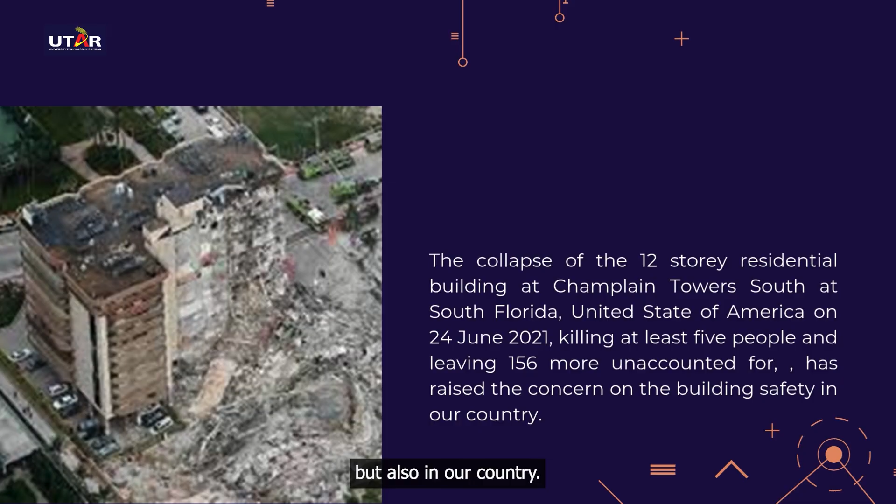The collapse of the 12-story residential building at Champlain Towers South in South Florida, United States of America in June 2021 has killed at least 5 people, with 156 more unaccounted for. This has raised concern on building safety, not only globally but also in our country. The question is, are our buildings safe?

How important is building assessment? In this Florida building collapse, a building assessment had been carried out by an engineering consultant, who warned in their report that there were major defects in the Florida building in October 2018, even before the building collapsed this year.

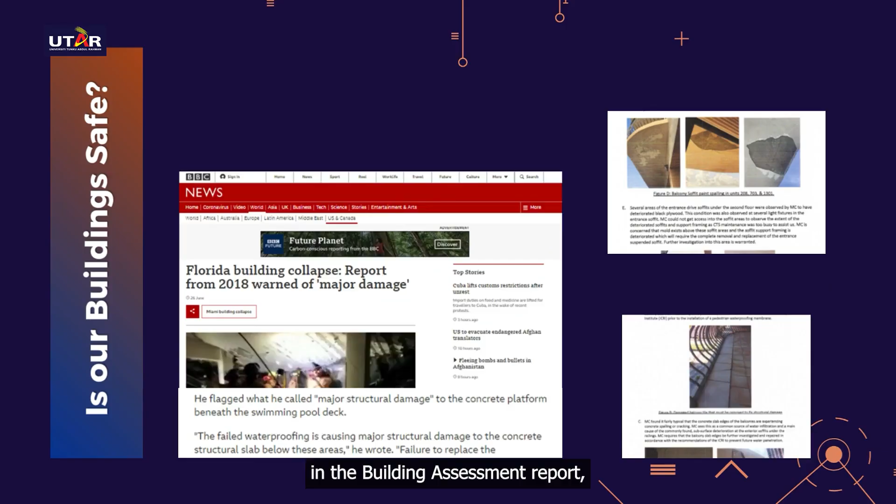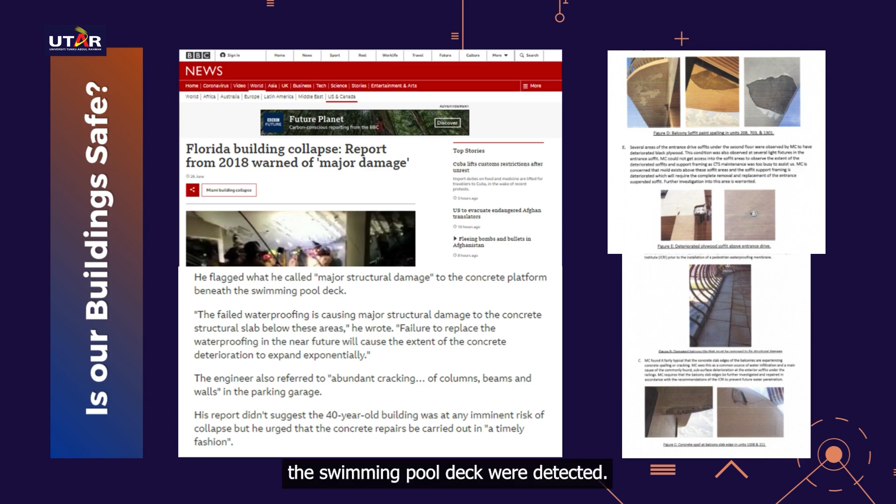In the building assessment report, it was highlighted that major structural defects to the concrete platform beneath the swimming pool deck were detected. The engineers also detected waterproofing errors, cracks below the structural slab, and cracking at the columns, beams, and walls in the parking garage.

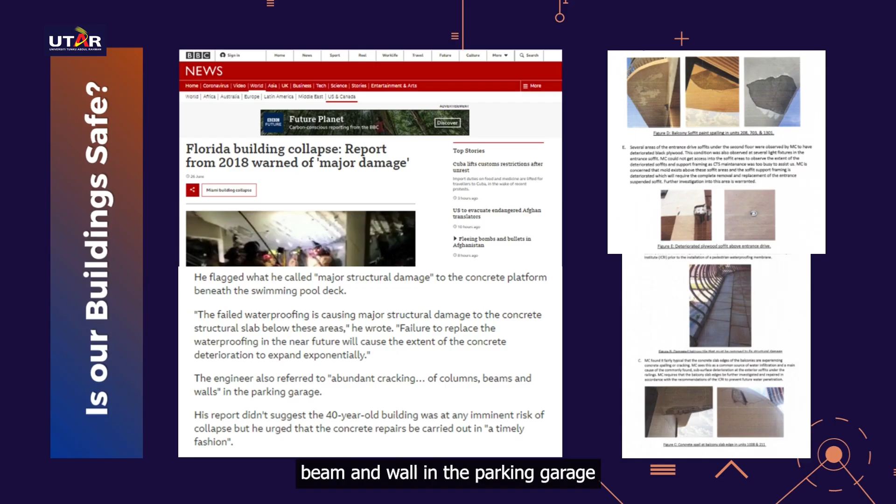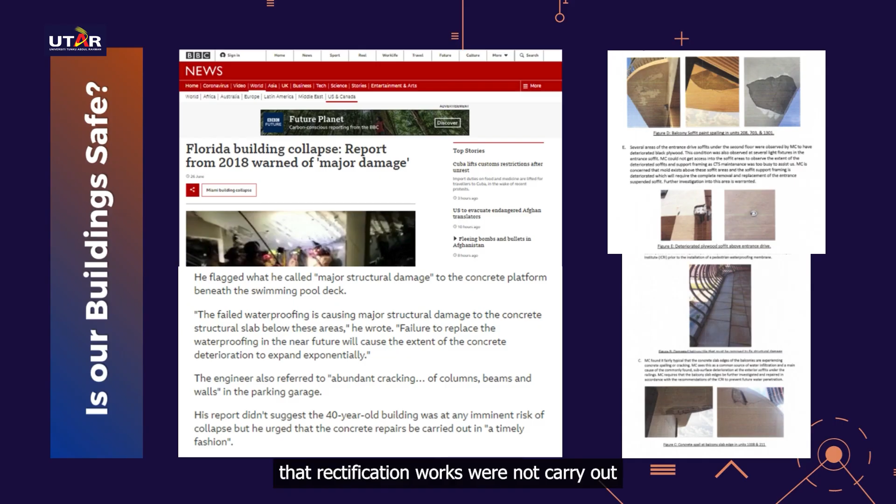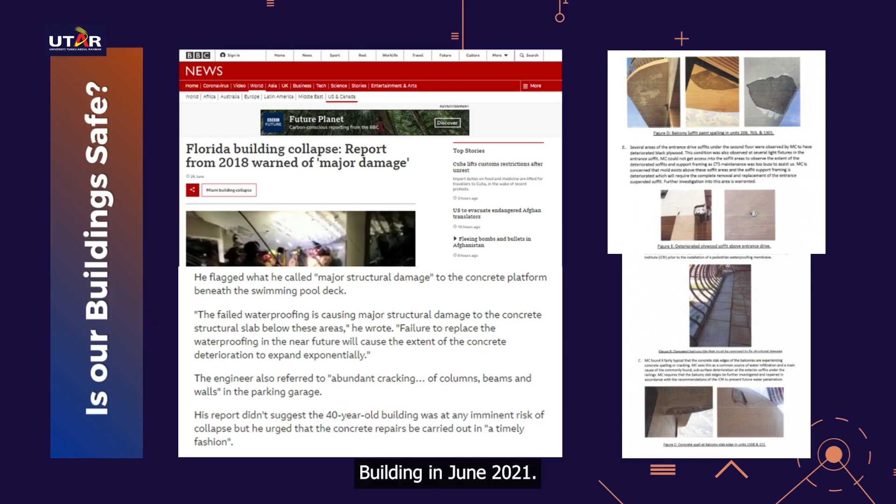The photos shown here are actual photos from the structural assessment report, showing the major cracks and defects of the Florida building that collapsed. However, it is important to note that rectification works were not carried out in this building, and this led to its collapse in June 2021.

Does this event only happen in the US? Is this an isolated case? Just 2 weeks ago, we learned about the new Hong Kong Pavilia Farm flat in Tai Wai, a construction building of more than 10 floors that needs to be demolished because the building assessment found it unsafe for occupancy, with major structural integrity issues that may be hazardous.

This is how serious building conditions can be. So does building collapse only happen in the US or Hong Kong, overseas? The question is, will this building collapse happen in our country? Is our building in Malaysia safe for occupancy?

This is one of the recent incidents of building collapse in our country. It happened in May 2019, where a building in Gombak near the LRT terminal in Taman Melati collapsed, killing 2 Indonesian foreign workers and injuring 3 others.

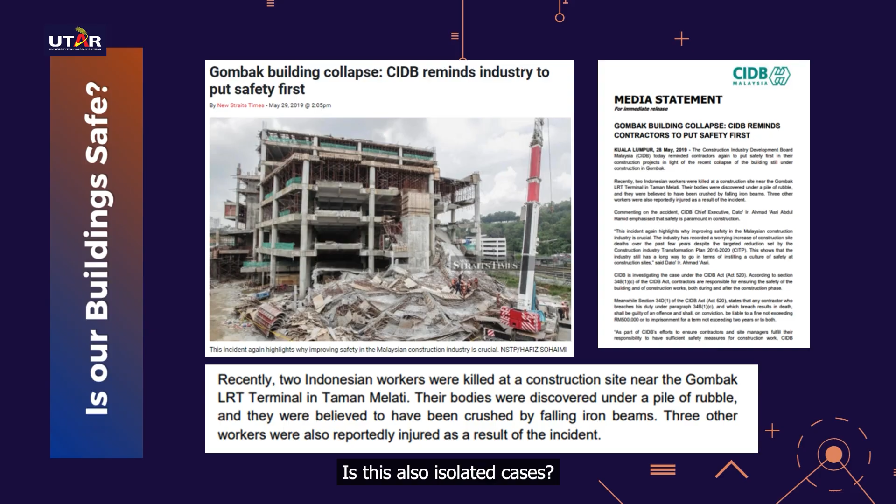Is this also an isolated case? No. Many would remember the Highland Towers collapse in Bukit Antarabangsa, one of the worst cases of high-rise building collapse in our history.

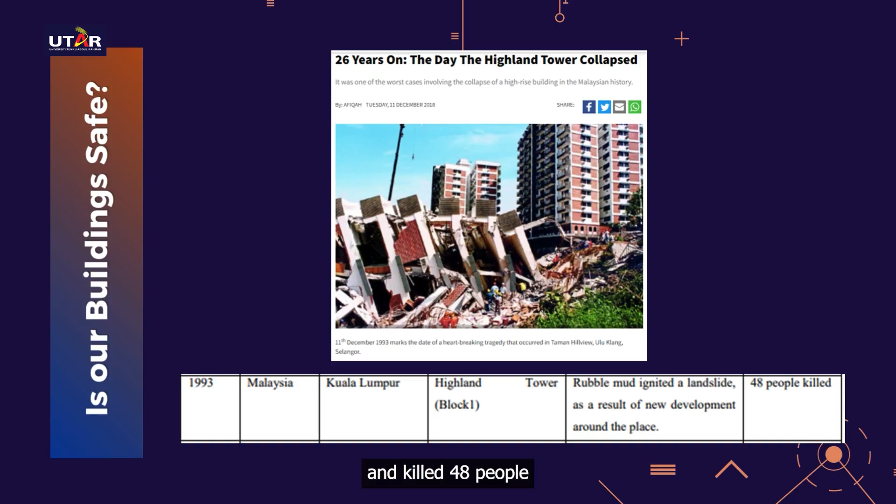It happened in 1993, where Block 1 of the Highland Towers collapsed completely, killing 48 people as a result of a mud landslide near the area. It was a huge site development in Bukit Antarabangsa, and not only did Block 1 collapse and kill many people,

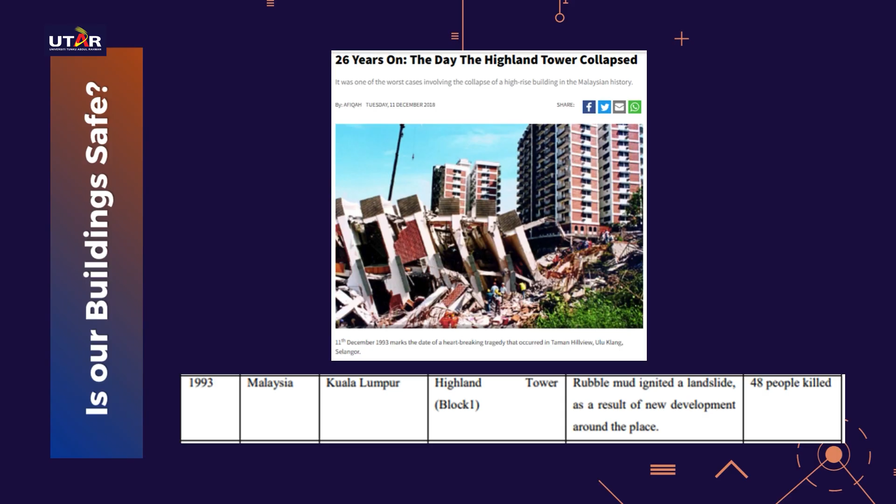but many people also lost their homes, as all occupants and house owners in Block 2 and Block 3 were instructed to vacate and leave their houses. All the units and apartments in Blocks 2 and 3 were abandoned, and these previous owners lost their homes overnight.

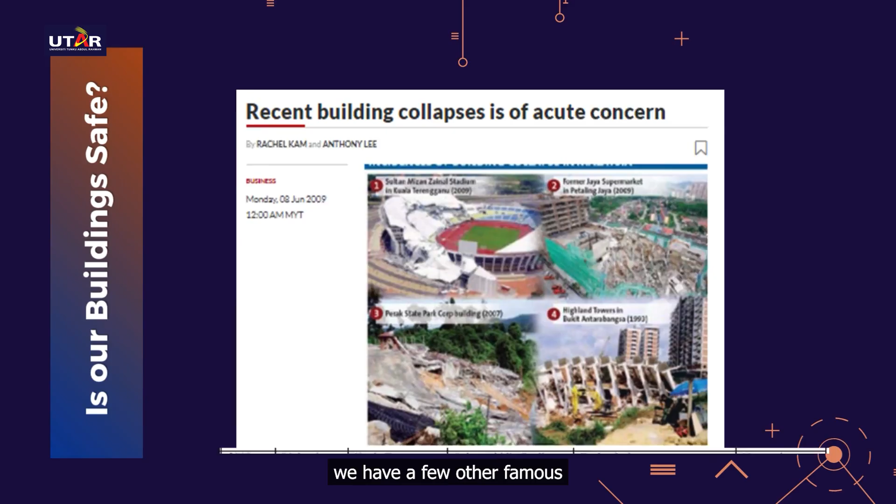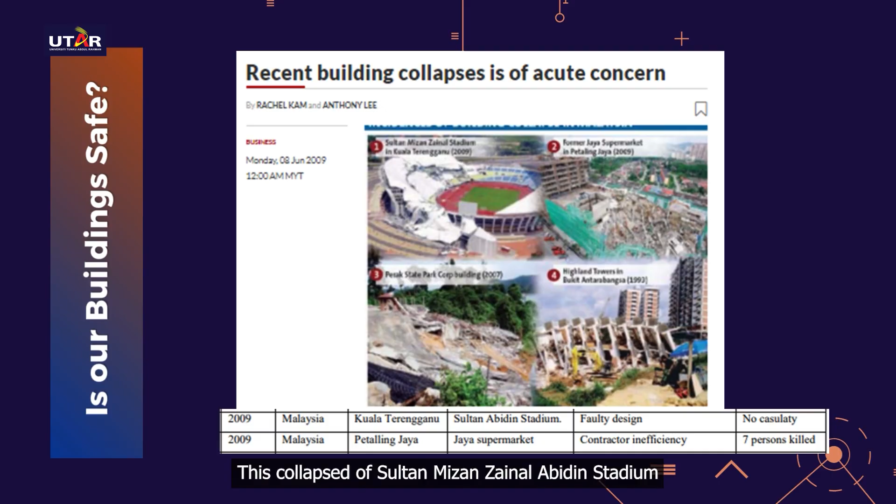Besides this, we have a few other famous building collapses that have happened in our country. Among them is the Sultan Mizan Zainal Abidin Stadium roof collapse in Kuala Terengganu, where the whole roof collapsed due to truss failure, though luckily there was no casualty.

However, in an incident nearer to us, the Jaya Supermarket building collapsed in 2009 and 7 people were killed. All these incidents have raised concern about building safety in Malaysia. How safe are our buildings in Malaysia then?

Generally in Malaysia, we have many pre-colonial age buildings that are still being occupied and in use. Is this building verified in terms of structural integrity and safety for occupancy?

In Malaysia, we also have many aged buildings, whether residential or commercial, still being occupied and in use. Some of these buildings can be more than 30 or 40 years old. Residents are staying there, and these are their only home. We cannot ask the residents to move out, but how do we assure that the homes they are staying in are safe for occupancy? What are the rules and regulations in Malaysia to ensure that buildings are safe?

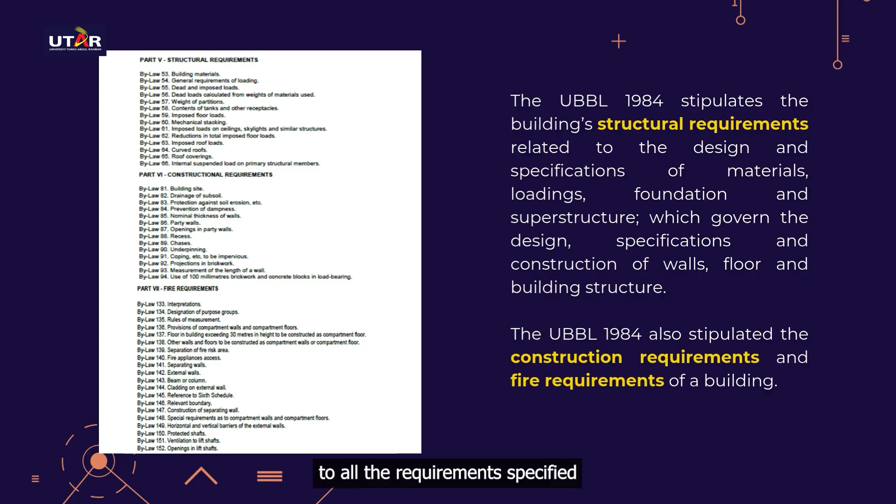Under the Street, Drainage and Building Act 1974, or Act 133, Section 85A requires that any building that is 5-story and above, exceeding 10 years old, needs to be inspected by a professional engineer registered under the Registration of Engineers Act 1967. This Act also specifies that the responsibility to carry out periodic building inspections lies with the owner of the building upon notice served by the local authority.

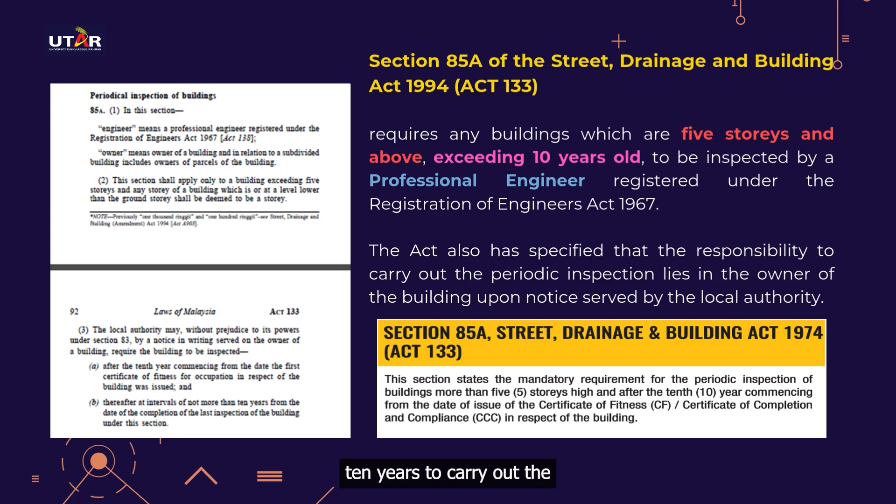Section 85A of the Street, Drainage and Building Act 1974, or Act 133, states the mandatory requirement for periodic inspections of buildings which are more than 5-story high, after 10 years, commencing from the issuance of the Certificate of Fitness or Certificate of Completion and Compliance (CCC) of the building. So Act 133 Section 85A has specifically required that any building more than 5-story high, exceeding 10 years, must carry out periodic building inspection.

The periodic building inspection shall be carried out by a registered professional engineer. After the visual inspection, if the engineer suspects that there is a defect, deformation or deterioration in the building or structural element which will or is likely to endanger or reduce the structural stability or integrity of any part of the building, he shall request permission from the local authorities to carry out a full structural investigation on the building or structural element.

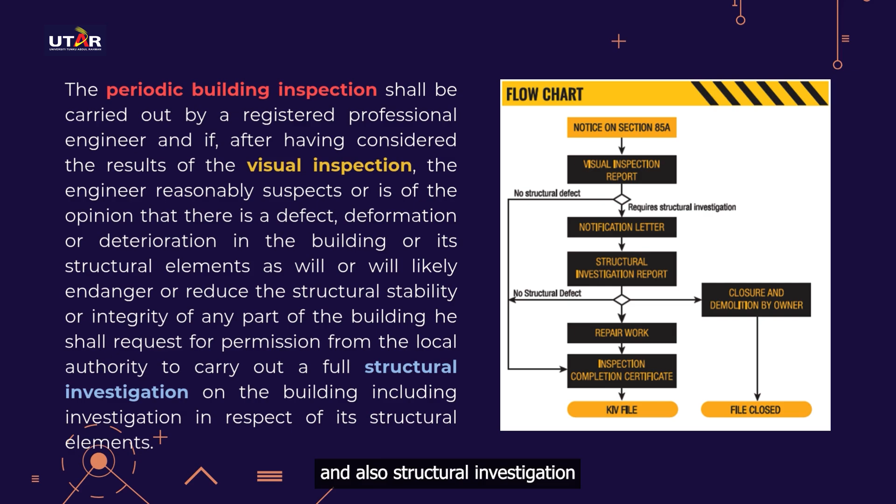The professional engineer appointed by the building owner will carry out the periodic building inspections through two methods: visual inspection and structural investigation where necessary. The local authority or PBT in Malaysia have their own guidelines for periodic building inspections.

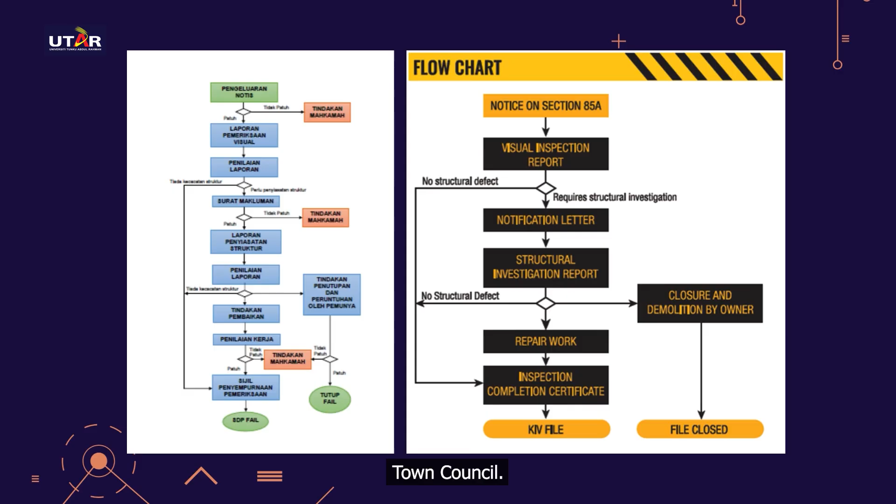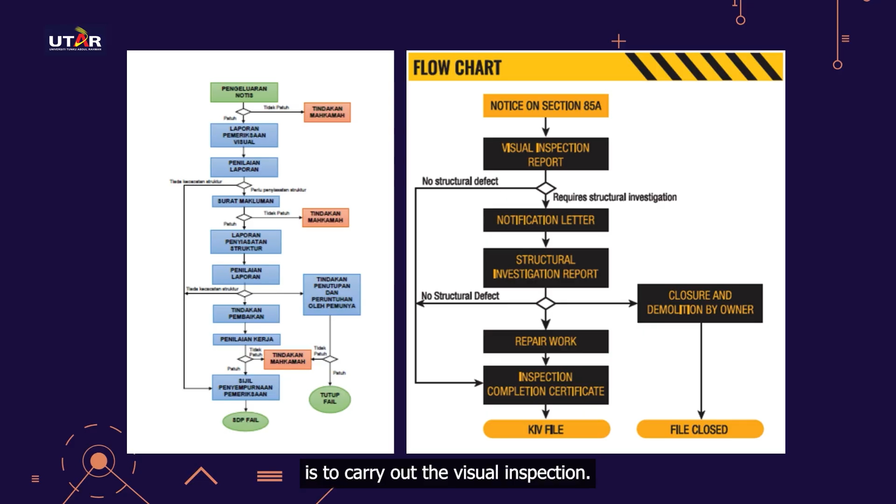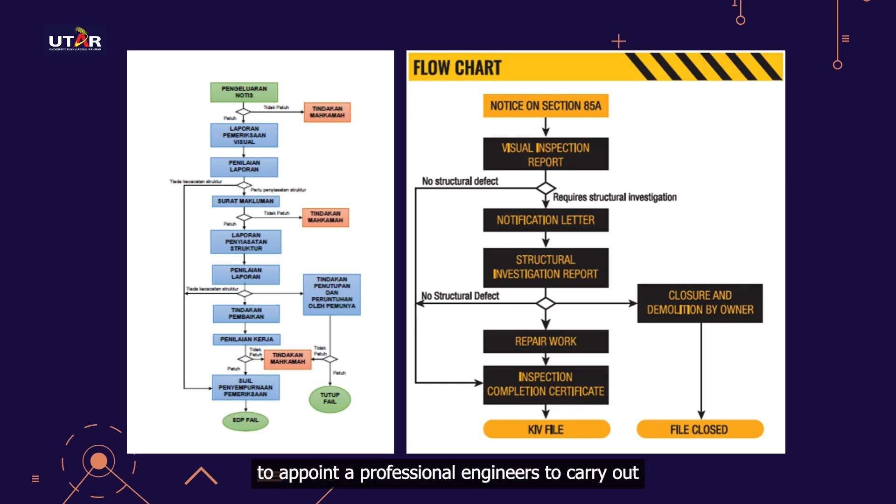As discussed earlier, periodic building inspections will be initiated by the local council through a notice served to the designated premise owner to carry out the visual inspection. The designated premise owner will then be responsible to appoint a professional engineer to carry out the visual inspection of the building. Upon the visual inspection, the engineer will produce a visual inspection report.

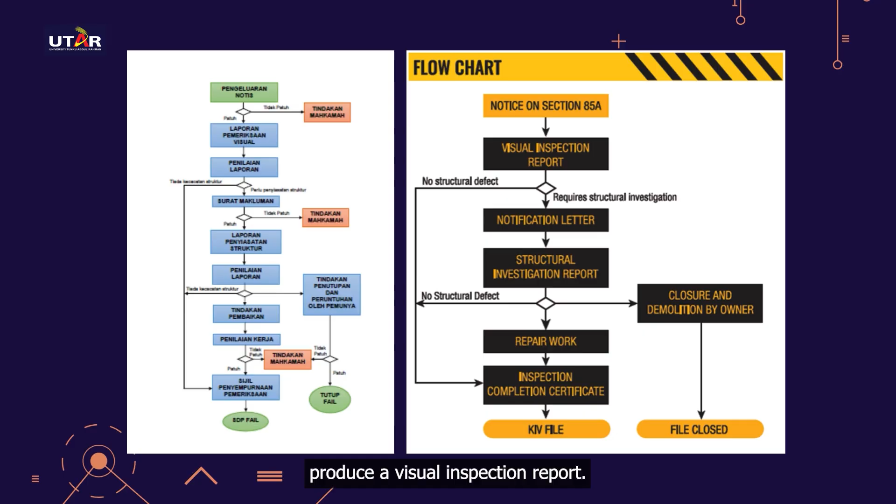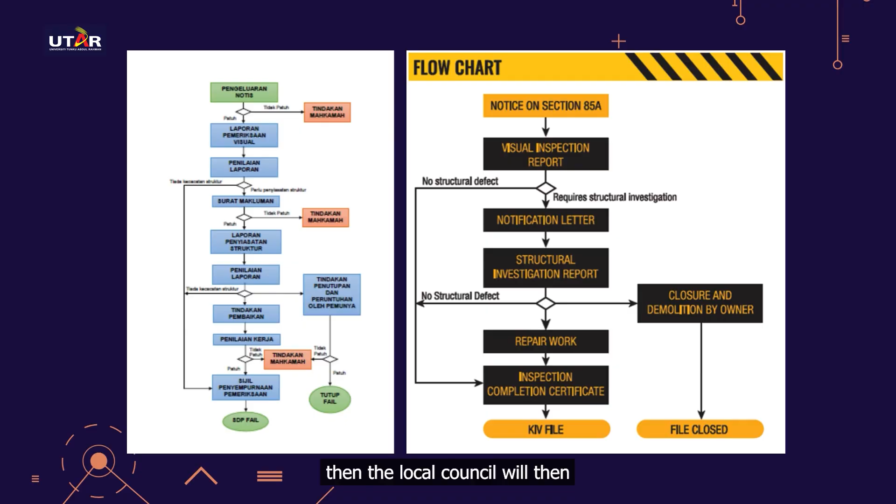If the visual inspection report finds that there is no structural defect found, then the local council will issue an inspection completion certificate to the designated building owner.

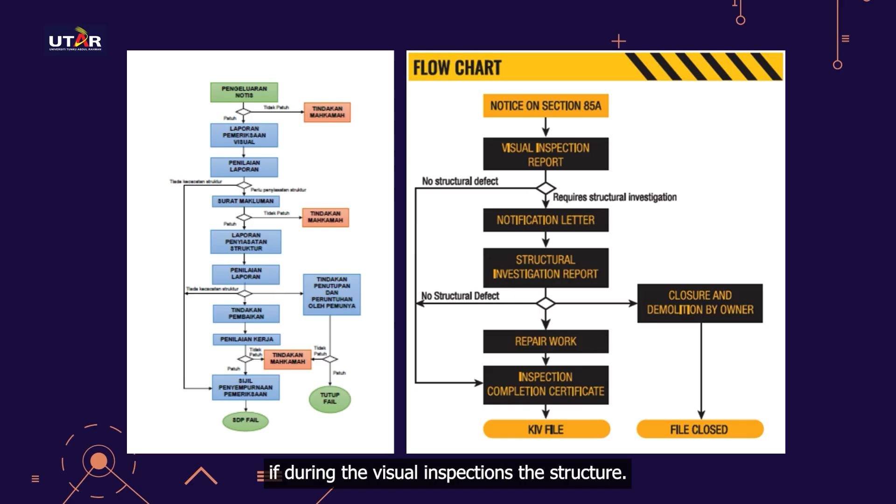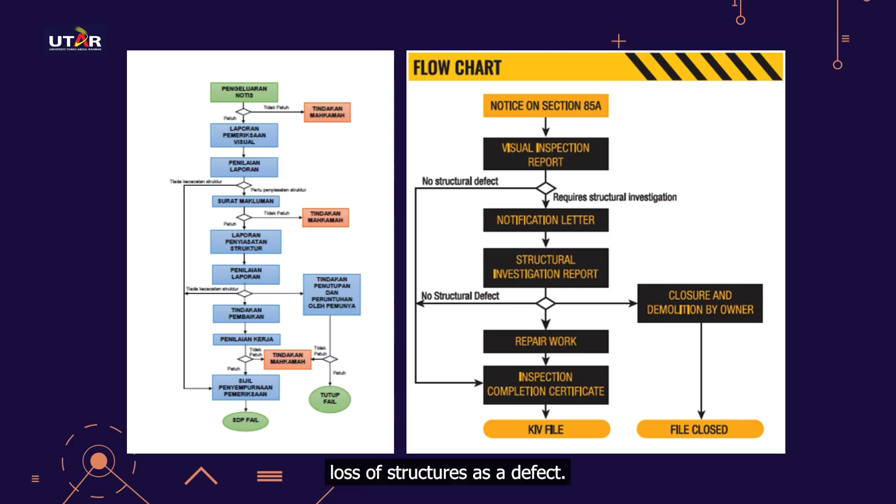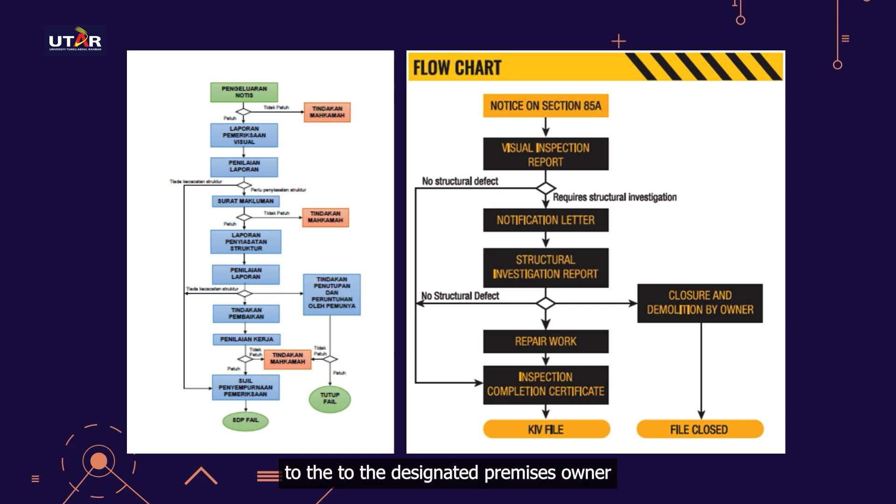If during the visual inspection the professional engineer found that there may be potential errors or structural defects, the engineer can recommend to the local council to carry out a structural investigation report. The local council will then issue a notification letter to the designated premise owner to carry out structural investigations.

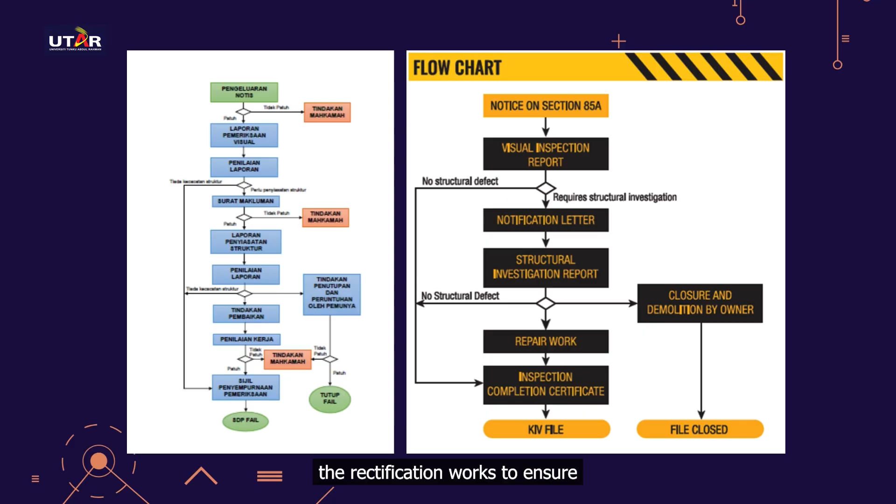Upon the structural investigation, if any structural defect is found, the owner will be responsible to carry out rectification works to ensure the building is safe and structurally sound for occupancy.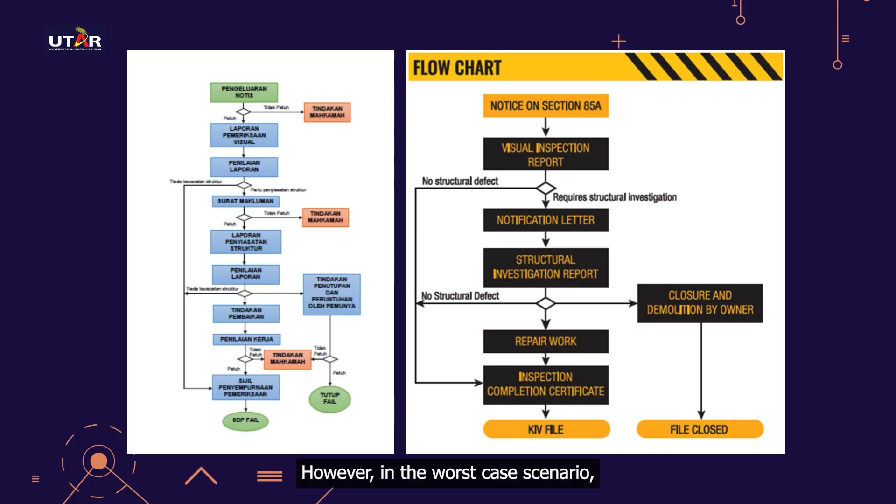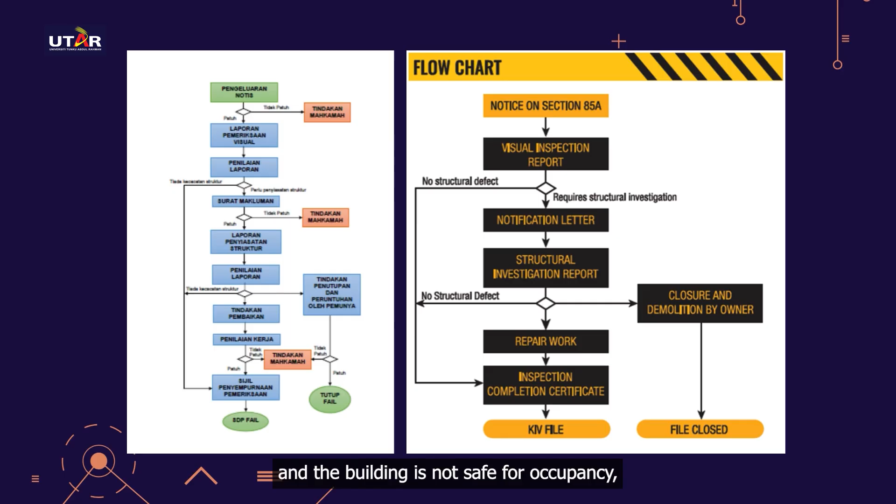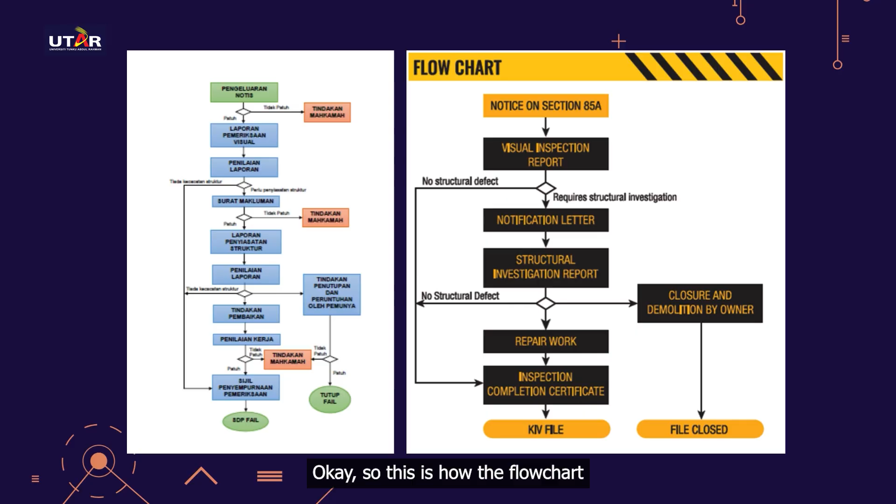However, in the worst case scenario, if the structural defect on the building is found to be very severe and cannot be rectified, and the building is not safe for occupancy, the engineer and the local council have the right to instruct for the closure and demolition of the building by the owner. So this is the flow chart of the periodic building inspection.

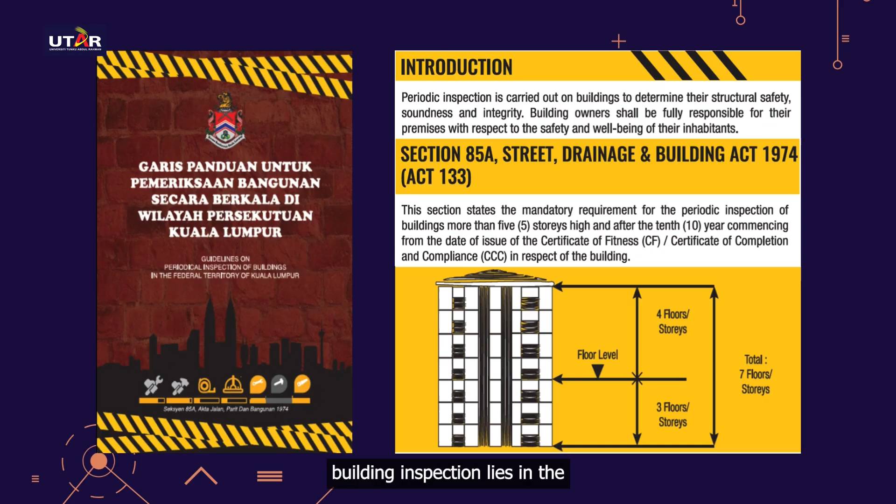In summary, periodic building inspection is carried out on buildings to determine their structural safety, soundness and integrity. The building owner is fully responsible for the premise with respect to the safety and well-being of their inhabitants. Act 133 has made it very clear that the responsibility to carry out the periodic building inspection lies with the designated premise owner.

Section 85A of Act 133 has made it very clear that it is mandatory for buildings that are more than 5 storeys high and more than 10 years old to carry out this periodic building inspection.

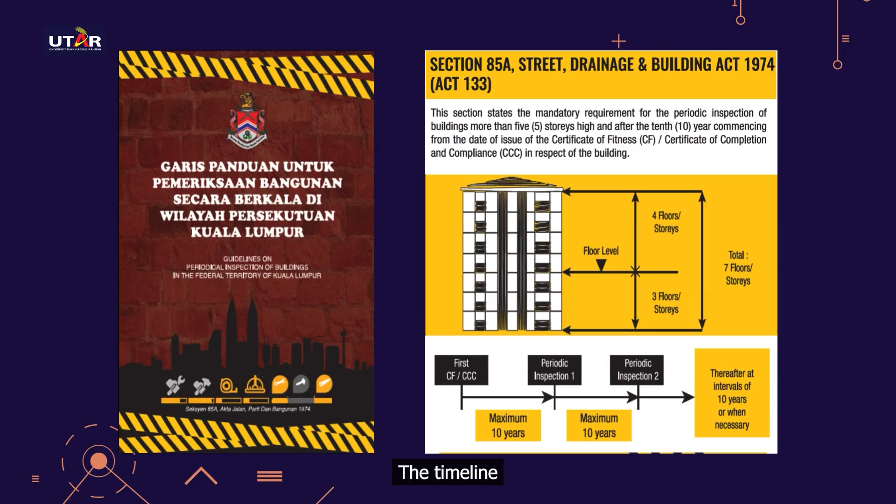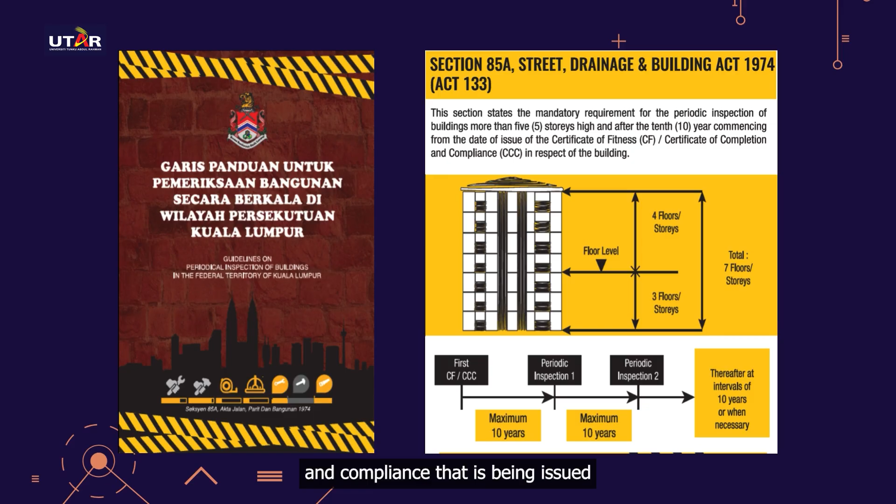So what is the timeline for these periodic building inspections? The timeline starts counting from the first CF, or the first Certificate of Completion and Compliance (CCC), that is issued to the building owner. At a maximum of 10 years, the local council has the right to call for the first periodic building inspection. And that's what happens after 10 years.

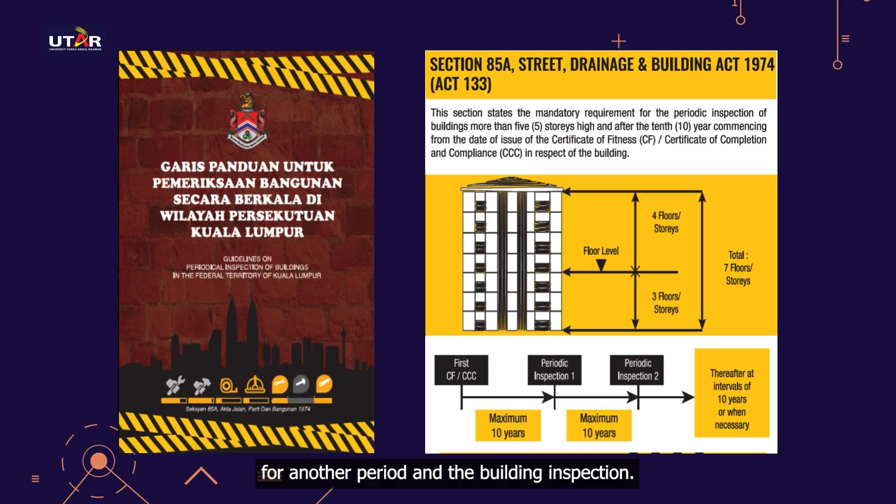In the next 10 years, the local council can issue another notice for another periodic building inspection. Thereafter, the local council can issue a periodic building inspection at every 10 year interval.

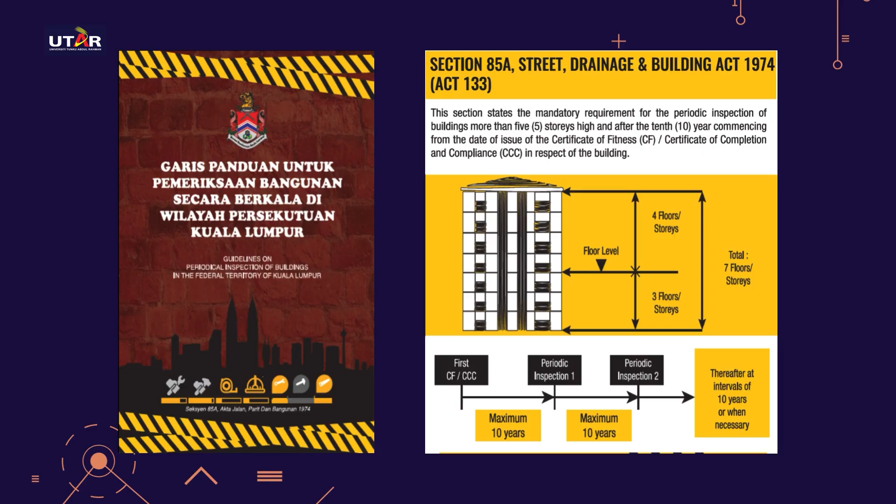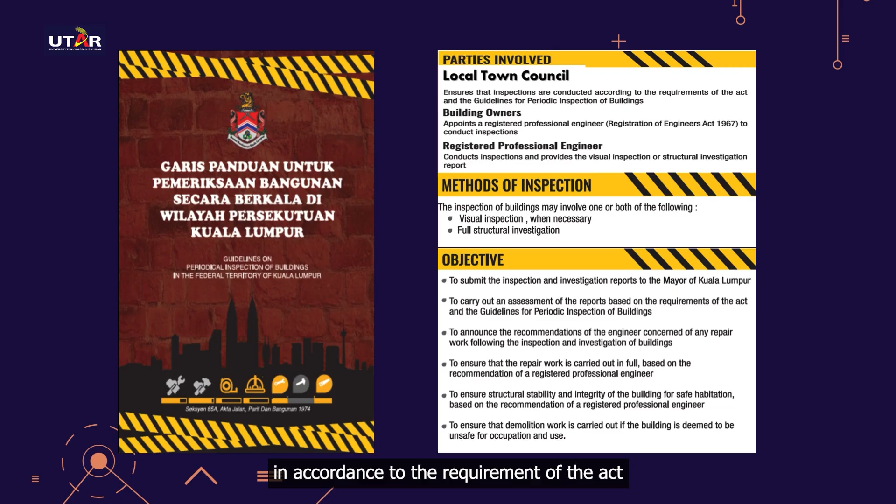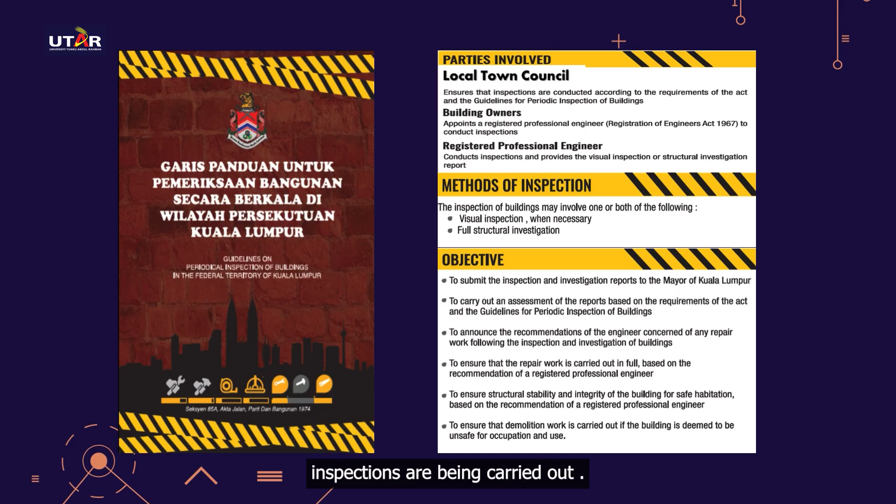So, what are the parties involved? The parties involved are the local town council, which are responsible to ensure that the inspections are carried out in accordance to the requirement of the Act and the guideline of the periodic inspection of the building. The local town council is also responsible to issue out the notice to the designated building owner to carry out this periodic building inspection. The local council will be responsible to ensure these inspections are being carried out, and that the inspection report are satisfactory and the building is safe after the periodic inspection is being carried out.

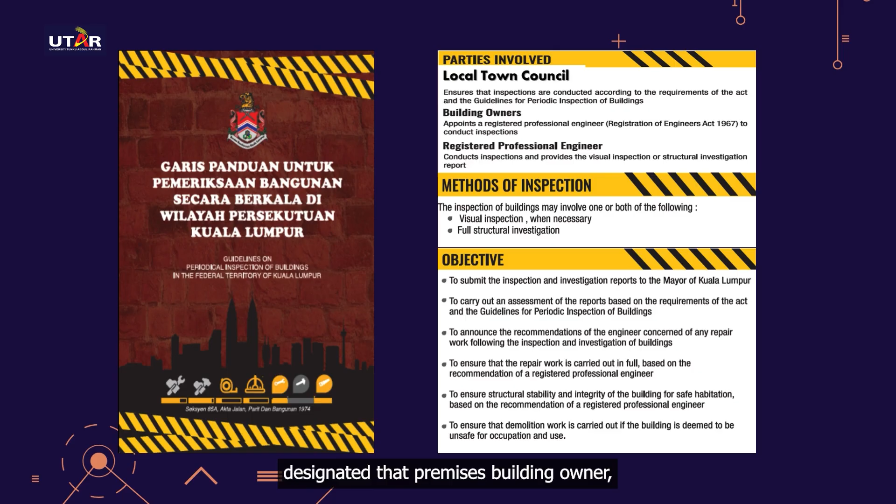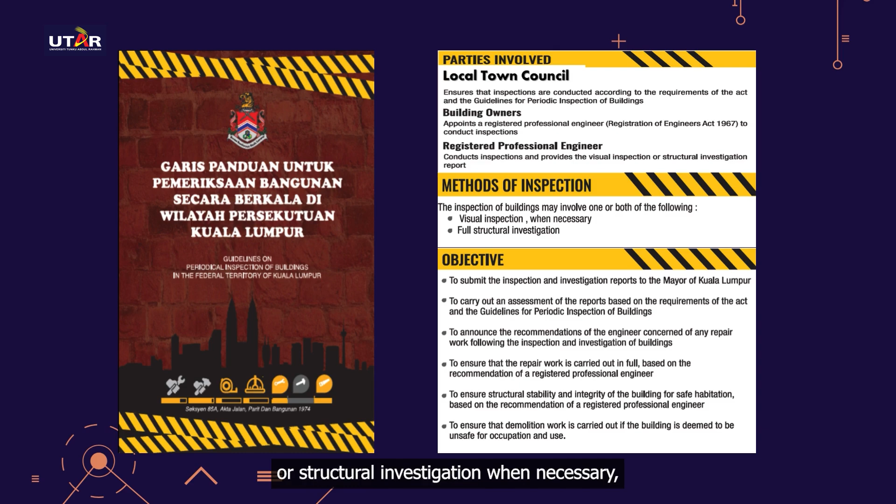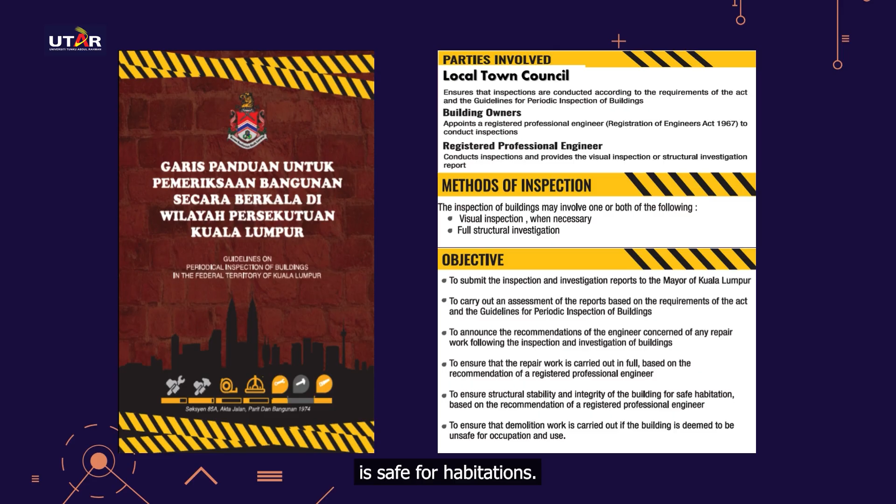The Act has specified very clearly that the responsibility to carry out the periodic building inspection lies with the designated premises building owner. So the building owners will be responsible to appoint a registered professional engineer to conduct the inspection. The registered professional engineer needs to conduct the inspections through visual inspection or structural investigation when necessary, to ensure that the assessment confirms the building is structurally stable and safe for habitation, in the opinion of the professional engineer.

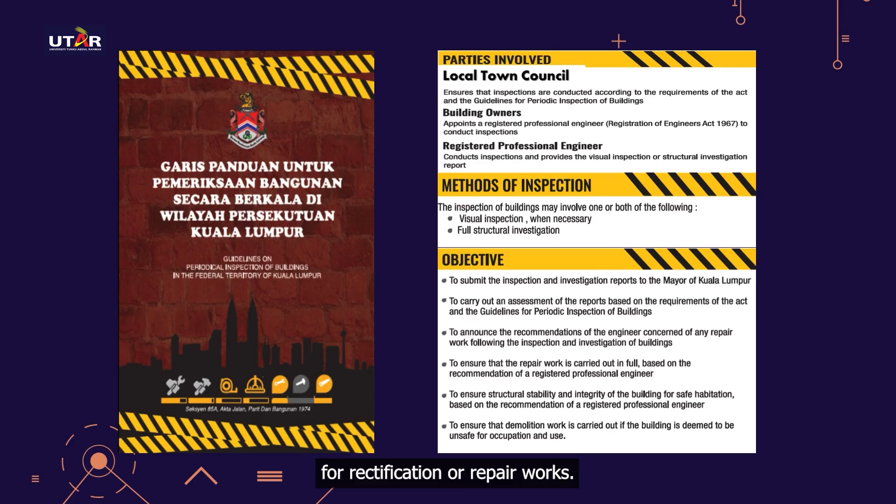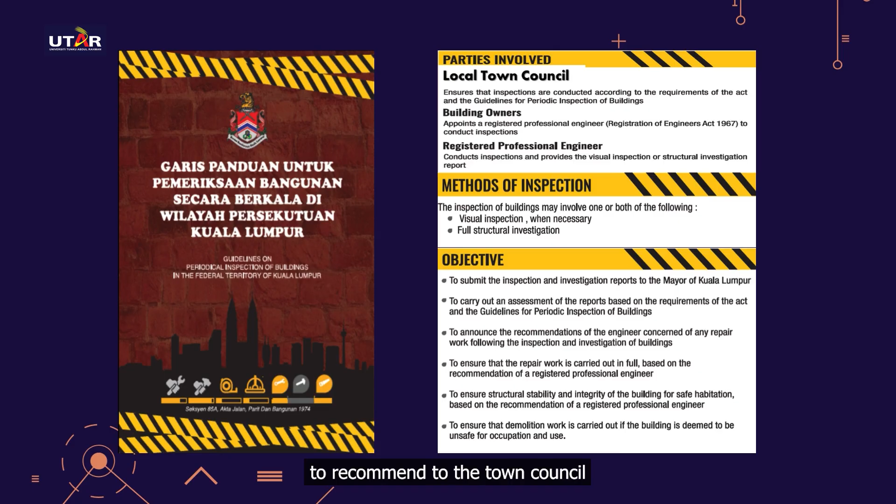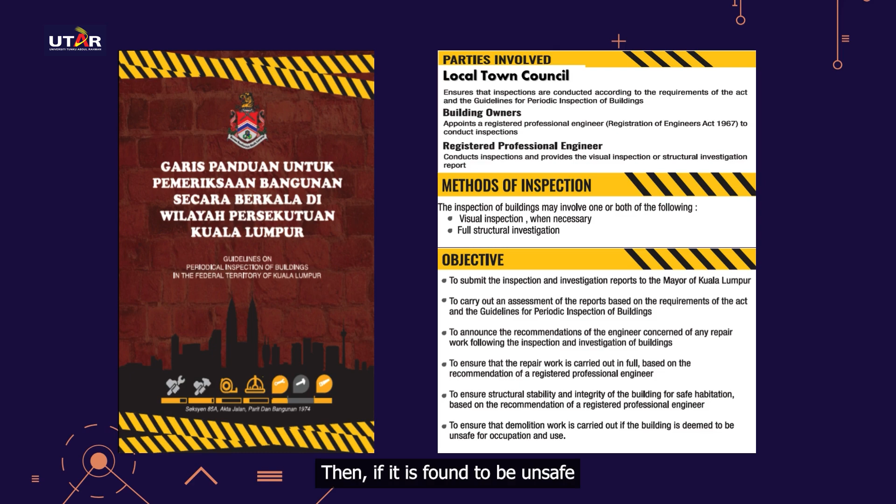In the event there is any requirement for rectification or repair works, the professional engineer who did the inspection will need to make recommendations for the rectification works. In the worst case scenario, where the rectification is very severe and the building is not safe for occupancy, the professional engineer has the right to recommend to the town council that demolition works are required, and the town council has the right to instruct the owner to demolish the building if it is found to be unsafe for occupancy.

Generally, each local council has its own guideline for periodic inspections. At the current situation, the guidelines for these periodic building inspections are not uniform. Each local council has its own requirements, however most of these guidelines by the local council will have the same major components, such as the guideline for periodic inspections, the guideline for visual inspection and the reporting format, the content of the visual inspection report, the guideline for full structural investigations, the guideline for design and specifications for repair works, and the guideline for the report after rectification works.

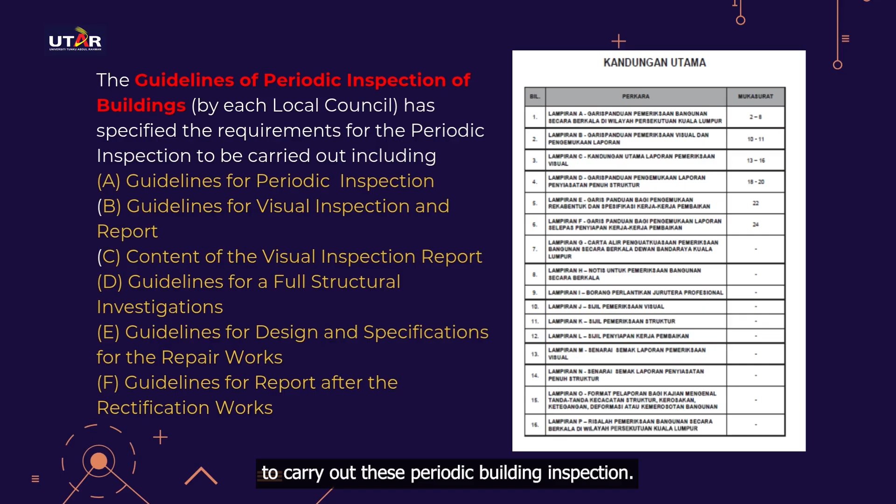The Act has specified very clearly that the responsibility to carry out the periodic building inspections lies with the owner of the building upon notice served by the local authority. Therefore, the local authority will serve the notice, untuk pemeriksaan bangunan secara berkala, or the notice for periodic building inspections, to the designated building owner.

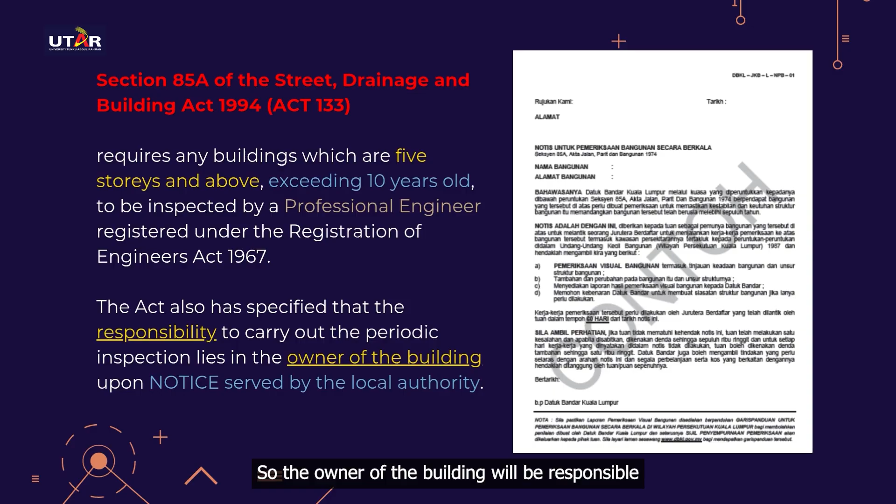So once the building owner receives this notice, the building owner is responsible to carry out the periodic building inspection. The owner of the building will be responsible to appoint a professional engineer to carry out the periodic building inspection. So what happens is the building owner needs to fill up a form certifying that he has appointed a professional engineer registered under the Registration of Engineers Act 1967, and submit it to the local council on his appointment of the professional engineer to carry out the building inspection works.

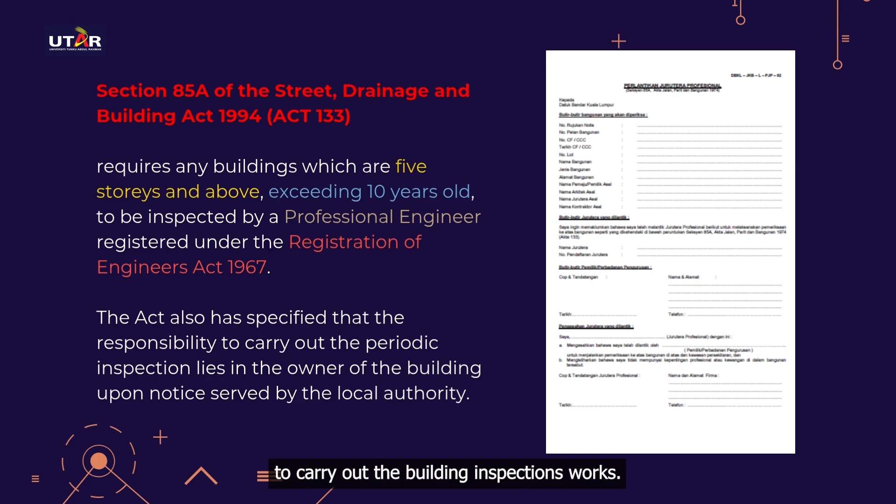After the appointment of a professional engineer, the professional engineer will start by carrying out a visual inspection. During the visual inspection, the professional engineer needs to check and ensure that there is no sign of any major structural defect on the building and that the building is safe for occupancy.

Upon the visual inspection, the professional engineer can make three recommendations. First, the engineer can recommend that there's no visual sign of any major defect. Second, the engineer can recommend that there is a defect observed during the visual inspection that requires monitoring, but it does not warrant structural investigations to be carried out.

Rectification works, if any, can be carried out during the inspection work. So all minor cracks or minor defects can be addressed during the visual inspection, where the defect only requires monitoring and structural investigation is not required.

However, if the engineer detects any major structural defect, the engineer can recommend a full structural investigation to be carried out, in the event the engineer finds signs of potential defects on the building or the slope protection system surrounding the building. This recommendation will be informed to the local council through a Sijil Pemeriksaan Visual, or visual inspection certificate, issued by the professional engineer employed by the designated building owner.

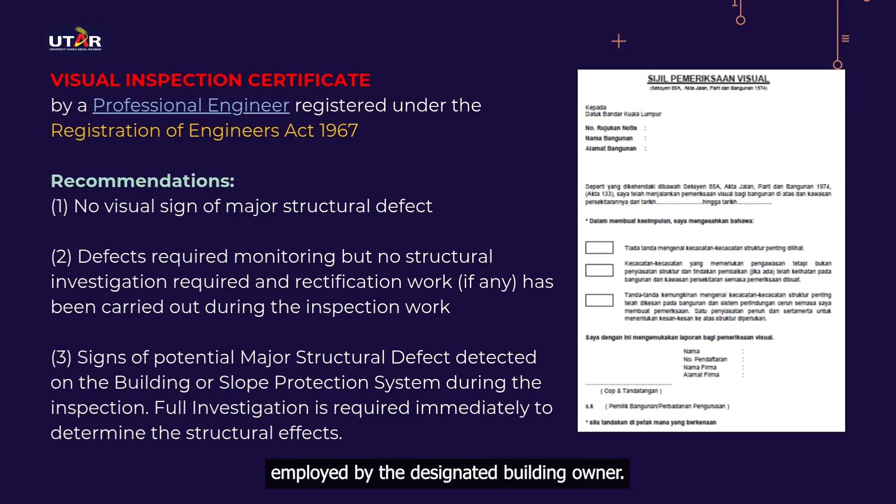If structural investigation is required, the engineers will need to carry out a structural investigation based on the structural plan that has been prepared. If there are defects found, the engineers will need to prepare a report and a proposal on how to do the repair and rectification works to the building.

The detailed proposal of these rectification works will be passed to the designated premise owner, and the designated premise owner is responsible to carry out the rectification works according to the recommendations by the engineers who did the building inspection.

So after the structural inspection is carried out, the engineers can make two recommendations. One is that the structural plan has been prepared and there is no major structural defect found during the structural inspection. The other is that the structural plan has been prepared, but structural defects have been detected and need to be rectified by the premise owner or the joint management body of the premises.

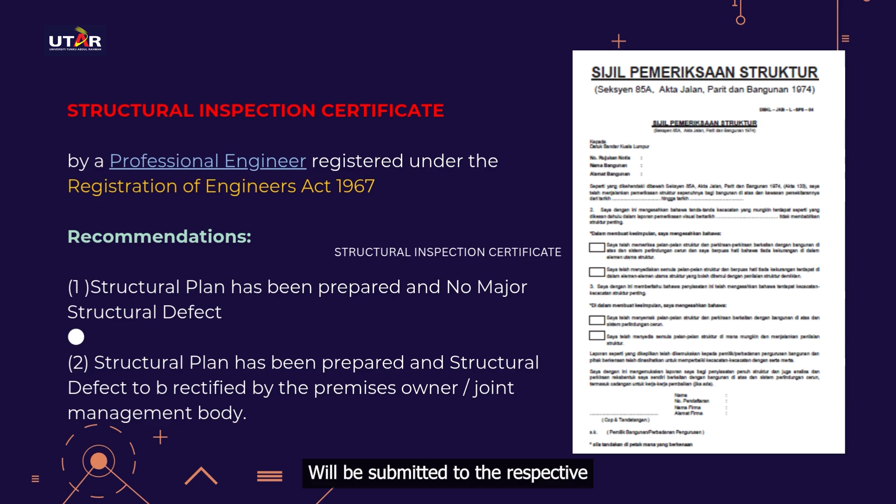This certificate of structural inspections, or Sijil Pemeriksaan Struktur, will be signed off and issued by the professional engineers and submitted to the respective local council in compliance with Act 133.

Upon receiving the structural investigation report, the designated building premise owner needs to carry out all the rectification as per the recommendations of the engineers. Once all rectification works have been completed, the engineers will need to do another inspection to ensure all rectification works have been completed to the satisfaction of the inspection engineer.

The engineers will then need to submit a Sijil Penyiapan Kerja Pembaikan, or completion of rectification certificate, to the local town council. If the local council accepts the completion of rectification works certificate by the professional engineers, the local town council will then issue a certificate of completion of inspections to the premise owner, meaning that the periodic building inspection has been completed.

It is important to note that in most local council guidelines for periodic building inspection, there is a checklist for the visual inspection report specifying all requirements, including how to report on defects, structural defects, damages, deformations, and deteriorations of the building.

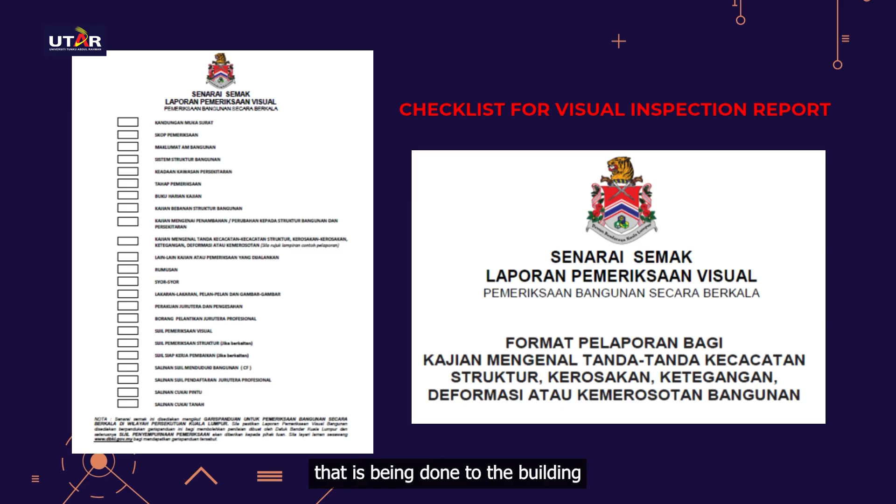All the scope of inspection works, details of the building structural system, conditions of the building, defects, monitoring, deformations, and any rectification and modification works done to the building need to be included in the visual inspection report. The inspection report will also call for all photos, comments, and recommendations by the professionals employed to carry out the visual inspection.

Besides the visual inspection checklist, usually the guidelines of the periodic building inspection from the local town council will also include the checklist for a full structural inspection report, or Senarai Semak Laporan Penyiasatan Penuh Struktur. This will include the scope of inspection required, the building information, and the source of the design and construction and repair works.

The checklist covers the design and new structural plans that need to be prepared, and any tests that need to be carried out must be included in this structural report. The scope of works for the rectification works also needs to be included in the structural inspection report, and this needs to be endorsed by the professional engineers and submitted to the local town council.

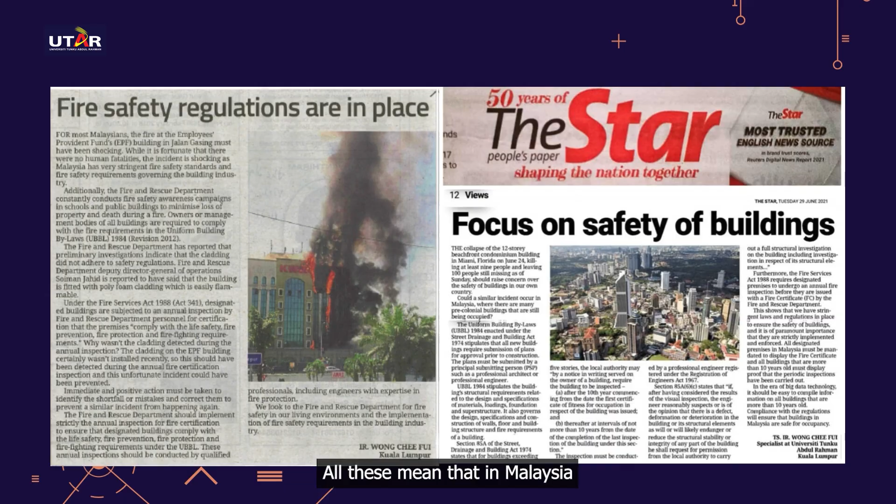What have we discussed so far about Act 133, the Street Drainage and Building Act, the UBBL 1984, and the Fire Services Act? All these mean that in Malaysia, we have the legislations, regulations, and guidelines in place for the safety of buildings.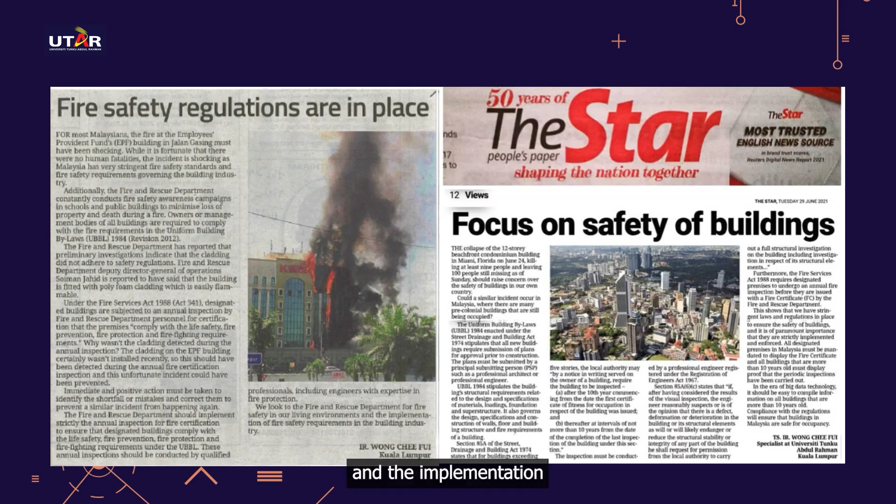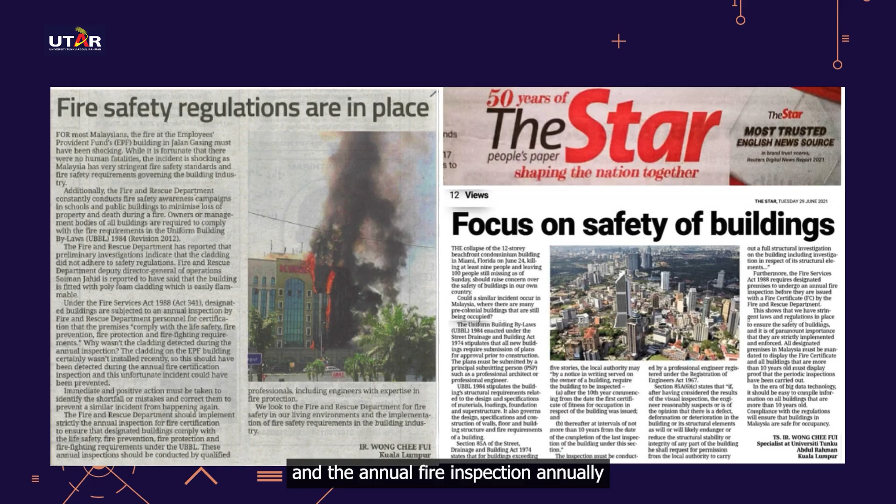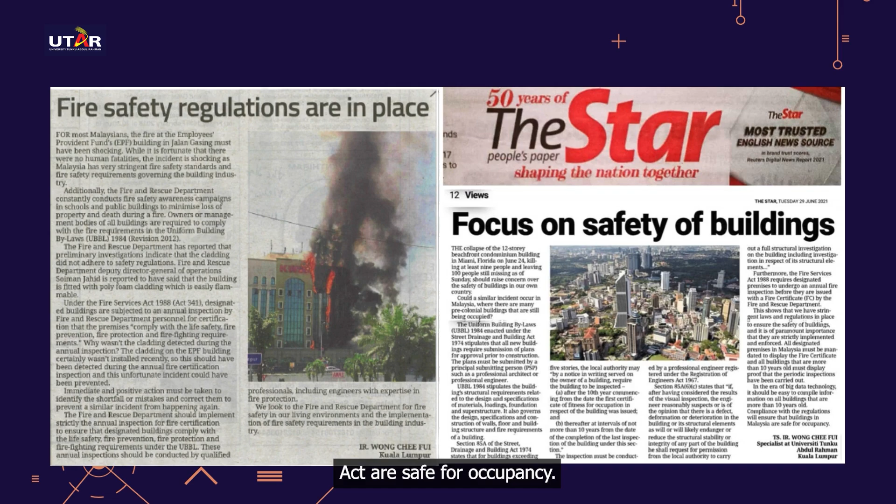However, it is very important that we ensure the enforcement and implementation of all these legislations, rules, and guidelines are carried out accordingly. The local authorities play a very important role to ensure that notices are issued to the designated premise owner, who needs to carry out periodic building inspections and annual fire inspections, to make sure buildings are safe for occupancy of all occupants.

So in Malaysia, we come back to the question we asked earlier: is the building in Malaysia safe? In Malaysia, we have many aged buildings, including pre-colonial buildings, that are still being occupied and in use. To ensure the safety of all these buildings, it is paramount that periodic building inspection and annual fire inspection are strictly implemented.

It shall be made mandatory that all designated premises in Malaysia display the fire certificate in their building, and all buildings more than 10 years old shall display proof of the periodic building inspection carried out. So although the rules and regulations in Malaysia are in place, there is still room for improvement.

Although the law states that periodic building inspections are the responsibility of the building owner, the notice for the periodic building inspection still needs to be issued out by the local authority.

Similarly, we have rules and regulations for fire certificates and periodic building inspection. However, it is not yet mandatory for premises to display this fire certificate and building inspection proof. Our rules should make it mandatory for all buildings to display the fire certificate and periodic building inspection, so that occupants and users of the building know these buildings are safe for occupancy.